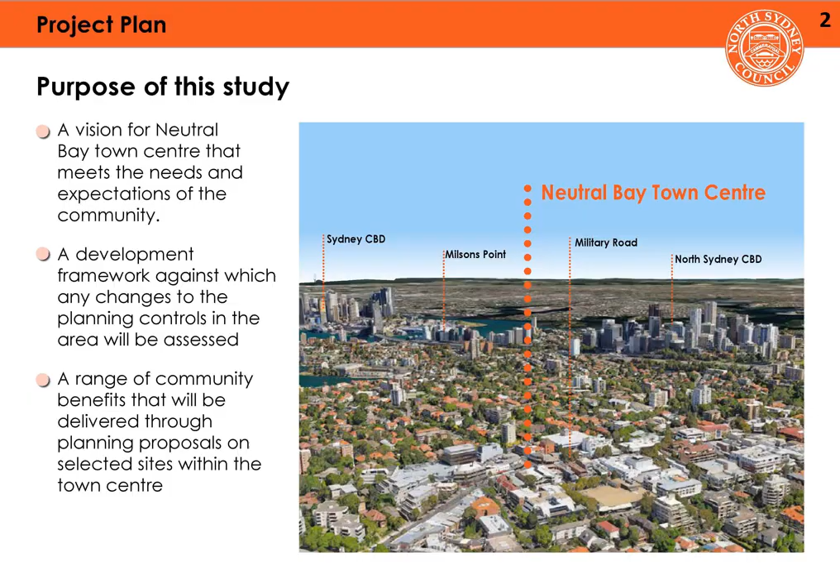Neutral Bay Town Centre is built on the traditional land of the Cammeraygal people. The name Neutral Bay comes from the non-British neutral ships that could anchor in this bay since 1789. Neutral Bay Town Centre started to flourish when a tram track was built along the ridge to supply fortifications at Middle Head. The tram track is what we now know as the Military Road.

The Neutral Bay Town Centre area is east of the Warringah Expressway and clearly away from the regional Eastern Economic Corridor that includes major infrastructure and high-rise development now being finalised, with further major growth being absorbed in this regional corridor over the coming years. East of the Warringah Expressway is distinctly different, with older, taller residential buildings rising up to 16 stories.

The B-Line Transport project has made an impact on public transport and regional traffic on Military Road in recent years. However, there's a great opportunity for the village feel of Neutral Bay Town Centre when the planned Beaches Link tunnel could potentially bypass the centre in the future. Council is negotiating the best outcome if this state government project gets the go-ahead.

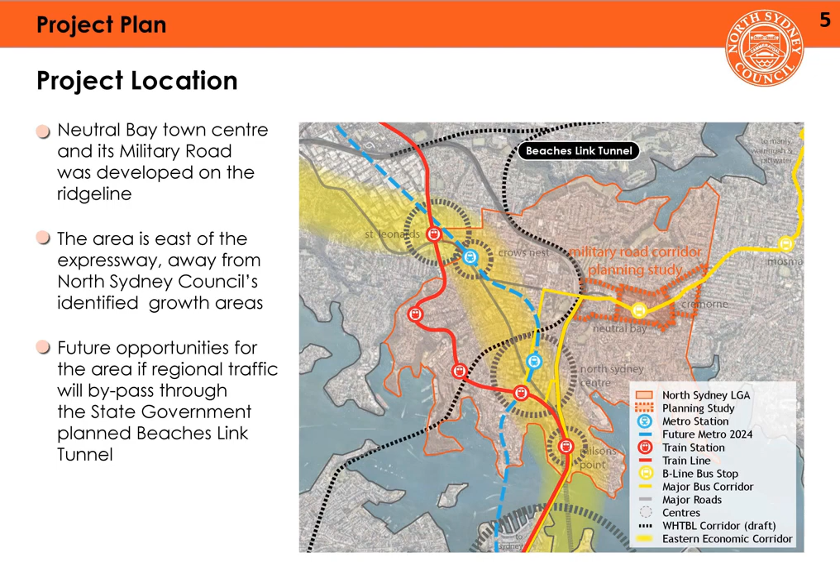The Neutral Bay Town Centre is dominated by commuter traffic on Military Road, which has created a major barrier between the northern and southern sides of the centre. The historical function of the road is clear in its physical structure. The scale and function has shifted in favour of the private motor vehicle, to the detriment of local and pedestrian amenity.

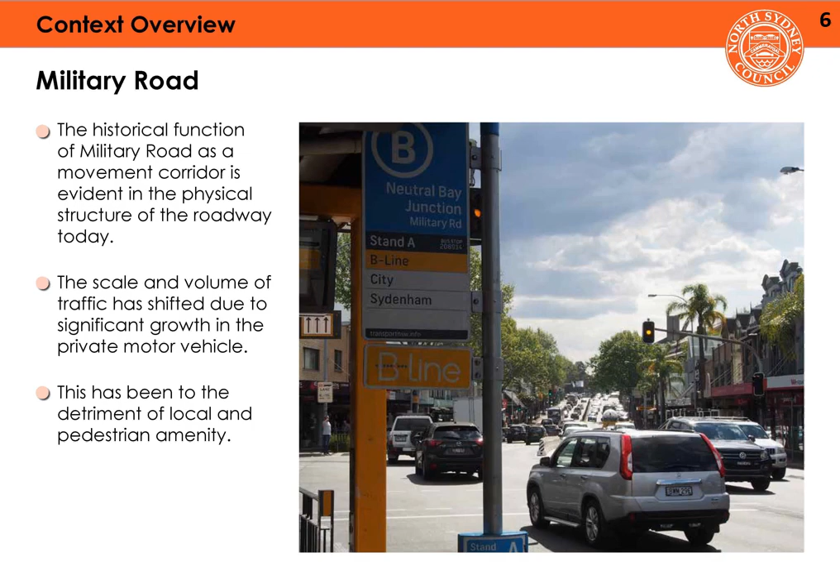And while pedestrian amenity has gone down, the residential density has gone up. Traditionally, buildings were predominantly fine-grained commercial, with single dwellings in the surrounding area. During the 70s, new buildings, including more office blocks and residential high-rises, were built, some up to 16 stories high.

The current planning controls enable modest increases in density. More density also means an increased demand on the public domain and community facilities.

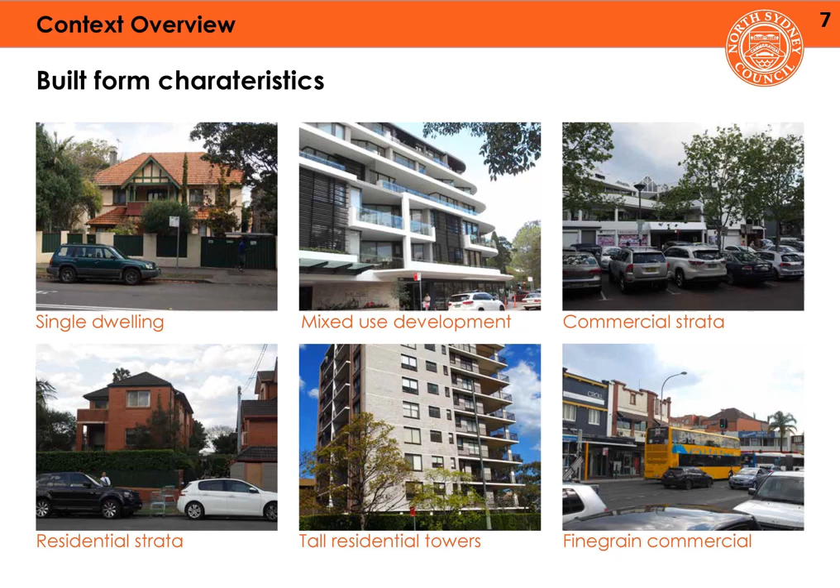The described characteristics result in a different demographic in the area compared to Greater Sydney. Residents are generally well educated and without children. There's a mix of users with a great amount of jobs balanced by residential dwellings. However, the redevelopment of office blocks and focus on residential development has slowly resulted in less office space. I will explain this more later in this presentation.

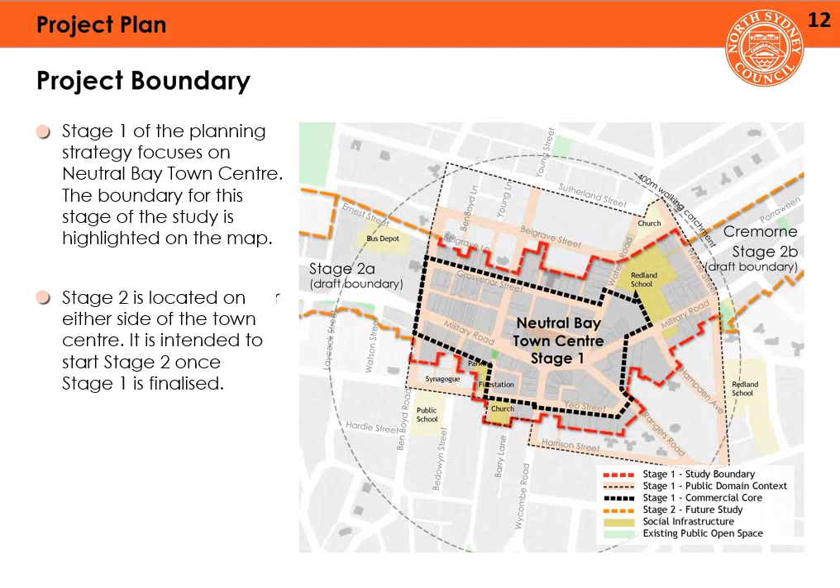Neutral Bay Town Centre is in a period of transformation, with current planning controls becoming increasingly outdated as demand for commercial, residential and community facilities intensifies. The existing planning controls are outdated and don't support the right balance of uses. And new development tends to result in residential strata-titled buildings, which constrain future changes to buildings. This is tending to reduce the amount of employment space currently in the centre.

New development can be balanced with public domain and community facilities that are informed by the needs and aspirations of local residents, businesses, and other users.

This is a rare and important moment for the area. Council can counter the identified decline in office floor space and jobs in the local area. Council can also balance the building height increase with tangible public benefits. And generally, sites are now changing to mixed-use strata ownership, while developers can challenge the existing planning controls. Therefore, doing nothing is not an option.

Under current legislation, developers are able to bypass council with their development aspirations directly to New South Wales government. Having a firm vision framework places council in a stronger position to negotiate the best community outcome when development proposals come in.

This report proposes contextual refinements to building controls and public domain. It seeks to meet the demand of future employment floor space, and it proposes in-kind public contributions on 4 selected sites in return for extra building height.

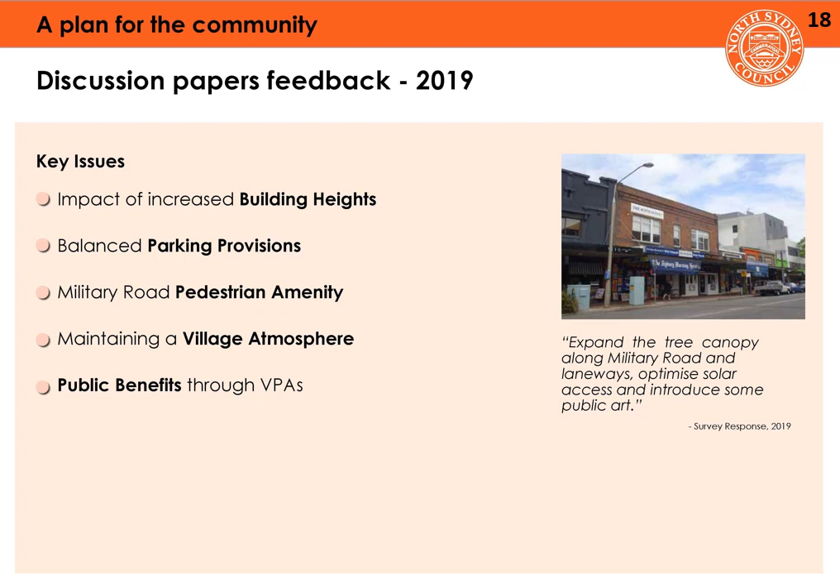Opportunities to deliver public benefits that are in high demand, such as public domain and community facilities, by private development were identified in more detail.

Chapter 2. Placemaking Strategy.

Previous council studies identified strategies for several council-owned assets. The North Sydney Council Community Land Study of 2016 identified ideas for better utility of the Barry Street car park. The 2015 Grosvenor Lane Planning Study presented ideas on the Neutral Bay Community Centre and the Grosvenor Lane car park. The strategies explored design and community benefit outcomes, including the provision of a public plaza, which is highly desirable.

These strategies and interventions were reviewed, are now updated, and combined in this report.

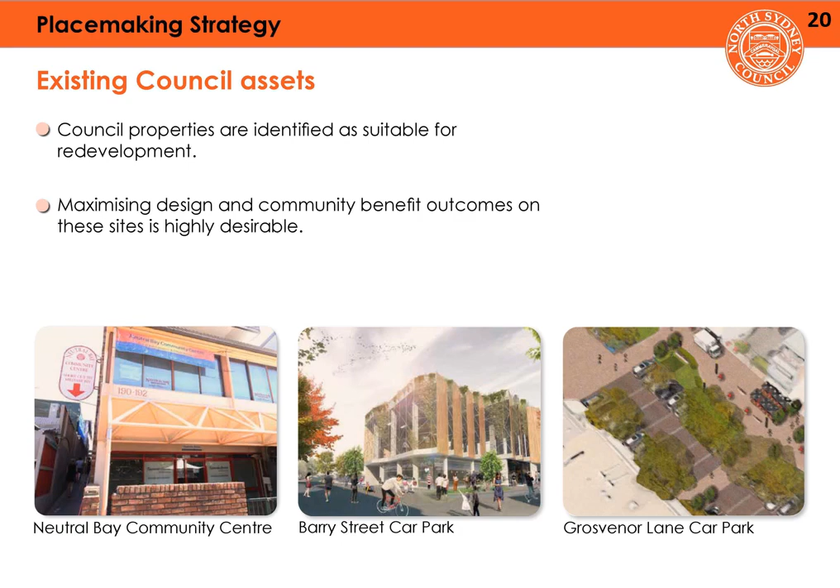Following analysis and community feedback, this report has identified the following demand for community facilities in the Neutral Bay Town Centre: an improved community centre, an indoor recreational facility that caters to a variety of sports and activities, artist studios and exhibition spaces, commuter bicycle parking, and a new affordable childcare space.

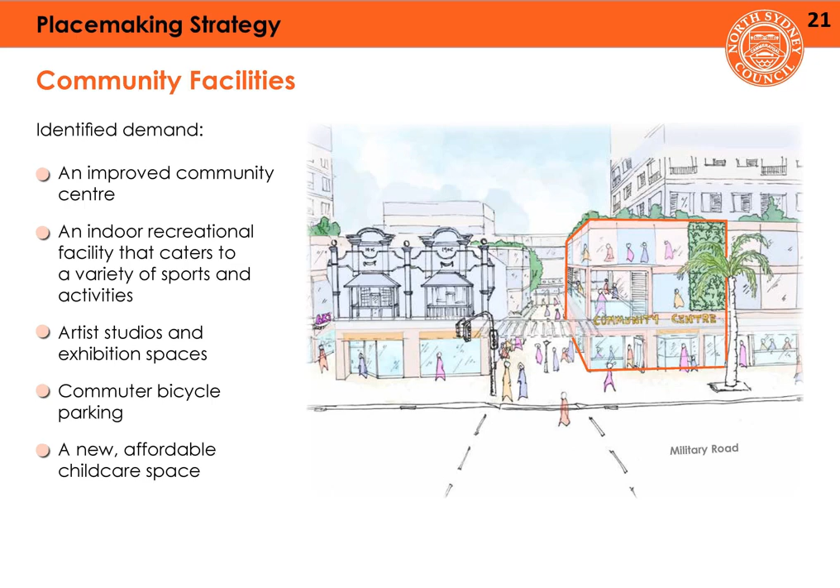The strategy further identifies opportunities for public domain improvements, including a pedestrian plaza with underground public parking and supermarket at Grosvenor Lane, shared zones on Waters Lane and Grosvenor Lane, pedestrian plaza and underground supermarket at Rangers Road, through-site links and ground floor setbacks, pedestrianised Barry Street and underground public car park, and a potential adaptive reuse of the Neutral Bay Fire Station could also provide further outdoor space at the back while respecting the heritage status of this building.

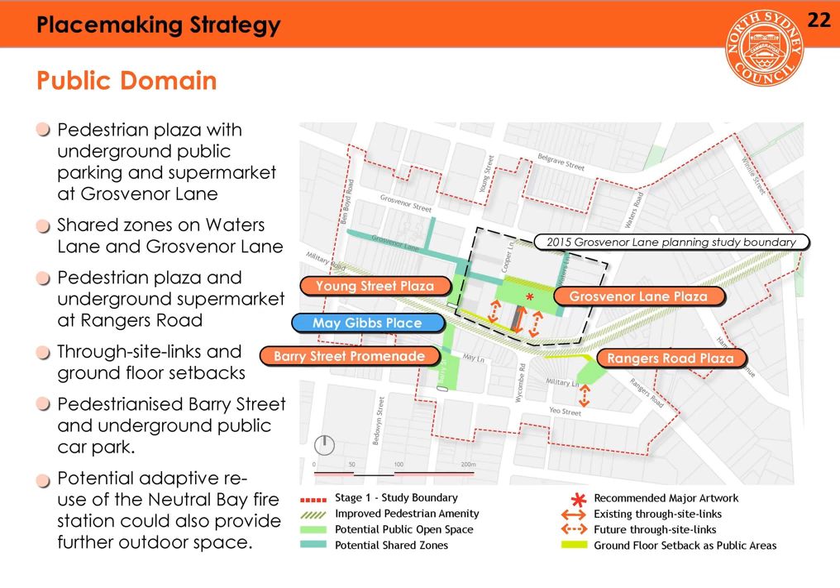As the need to deliver more community facilities and public domain improvement increases, it is crucial to look at how these facilities are funded. One key approach is the earlier described in-kind contributions, where Council negotiates with developers to deliver community benefits when assessing planning proposals.

Chapter 3: Future Growth.

Designing for pedestrians and increasing the amount of public space to walk, rest and socialize makes streets and public spaces accessible and safe for all ages. It also makes the town centre more attractive for businesses and residents.

The streetscape should be visually interesting and include engaging building frontages with continuous awnings to provide shelter. Materials for shared zones will continue across intersections to slow down traffic and enhance perception of pedestrian safety. This chapter aims to support cycling and walking as key modes of transport, enhance the connectivity and amenity across and along Military Road, and continue the support for loading needs of local businesses.

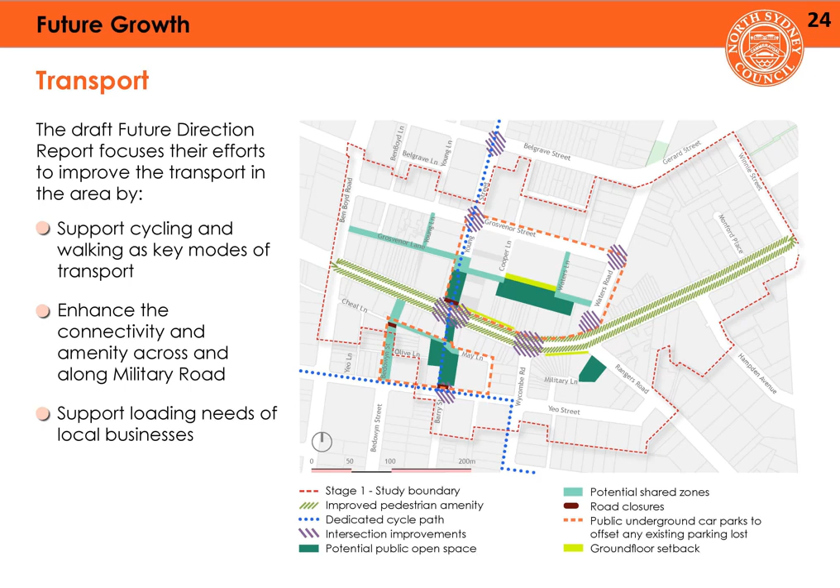When looking at transport, parking is an important consideration. The draft Future Direction report proposes to maintain the existing parking spaces and move 155 spaces underground. Introducing further public parking would increase the amount of traffic onto the road network, which would lead to more congestion, increased risk of crashes, decline in pedestrian activity, less on-street social interaction, and poorer community health outcomes. Poorer on-street shopping amenity would also result in a decline of business activity.

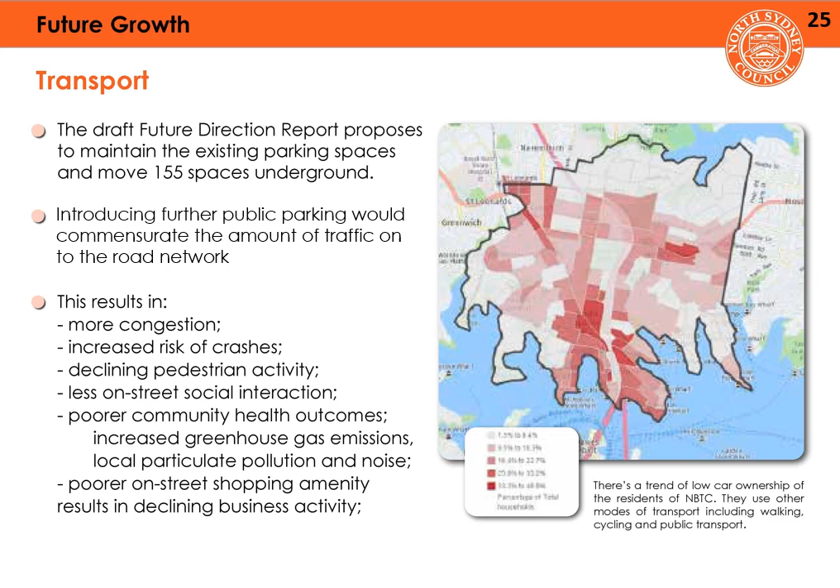Analysis on employment has shown that recent development has included far less office space. If this trend continues, more than 1,350 jobs and almost all office space will be lost. Currently, we have 2,850 jobs in the area, but that could go down to 1,500. This is in stark contrast to the need to actually grow to 4,000 jobs in 2036 to keep up with local demand and local jobs.

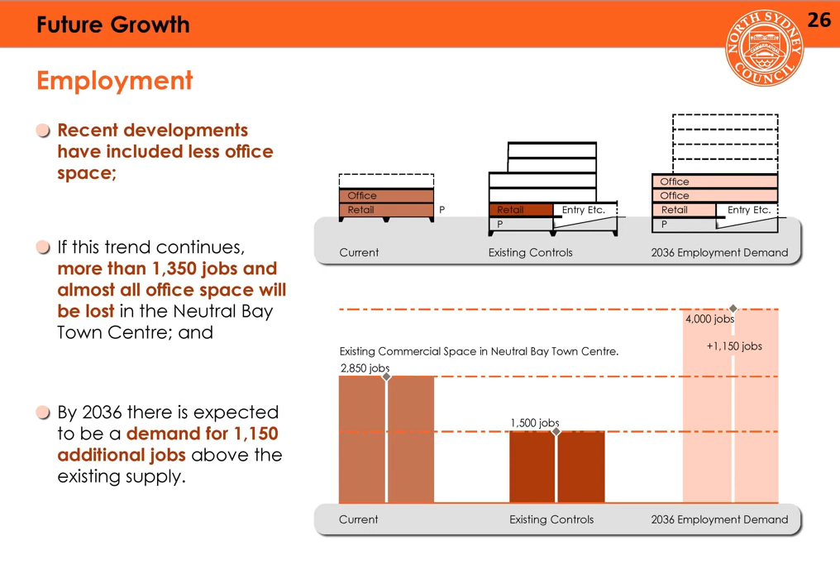The report aims to maintain the existing level of shops and services in the centre and ensure that new development supports long-term employment to keep local jobs in the area. To do that, we need to change the planning controls by increasing the non-residential floor space ratio and building height to deliver this.

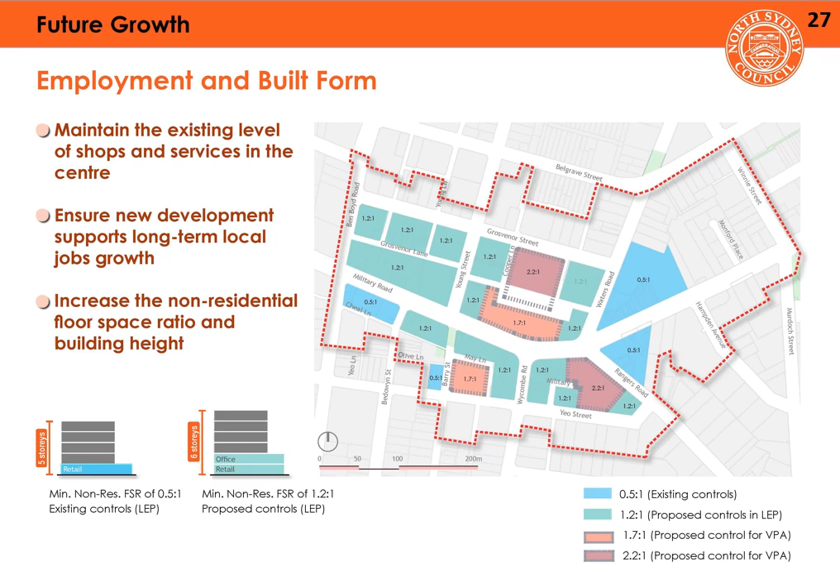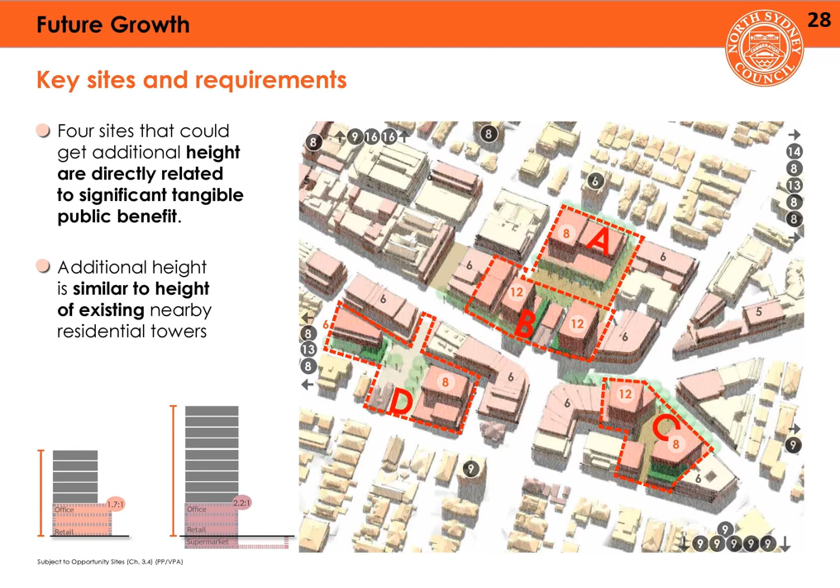Feedback during initial community engagement highlighted a need to deliver additional public open space and community facilities. Four key locations for development have been identified to deliver these public benefits, having regard to the capacity of those sites to support additional development. Planning control changes on these sites would include increases to maximum building heights and employment floor space. Public benefits will be negotiated via a planning agreement to support each planning proposal. Key urban design principles for each site are described in the following slides and should be referred to when a planning proposal is prepared.

Site A is located at 4351 Grosvenor Street and contains the council-owned Grosvenor Lane car park and a large supermarket. The site is enclosed by Cooper Lane, Waters Lane and Grosvenor Street. Further non-residential floor space is required. There is potential to improve public amenity by creating a fully pedestrianised plaza, an underground public car park, as well as a supermarket. A ground floor setback on new development widens the plaza. By focusing the distribution of higher buildings to the Grosvenor Street edge, maximum solar access to the plaza is achieved.

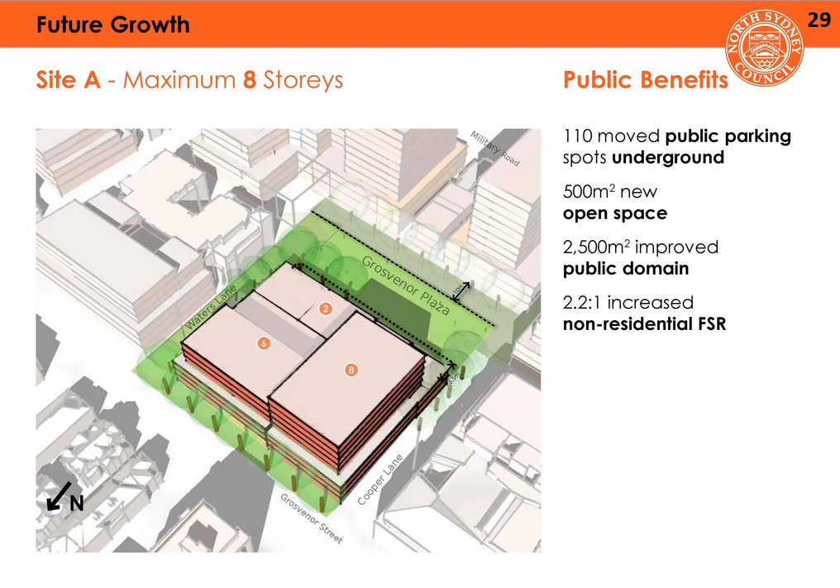Site B is located at 176-214 Military Road and includes part of Grosvenor Lane car park. The site is bounded by Military Road and Grosvenor Lane. Properties to the north directly along Waters Lane and south directly along Young Street are not included in the scheme. It enables development of 2 mixed-use buildings of up to 12 stories in height, supported by new and improved public domain, a community centre, accessible facilities, creative space and through-site links. Existing heritage buildings will be integrated thoughtfully into any new development.

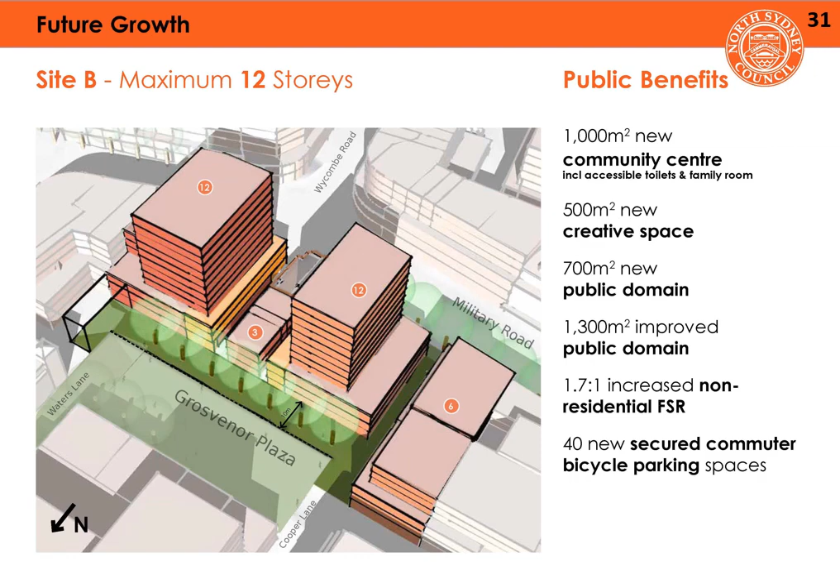Neutral Bay Town Centre has 3 unique pedestrian connections from Military Road into the Grosvenor Lane car park. Retaining these links when redevelopment occurs is part of this plan.

Site C is located at 183-185 Military Road and 1-7 Rangers Road. The site is enclosed by Military Road, Rangers Road and Yeo Street. It includes a new public plaza, a recreational facility and a through-site link to Yeo Street. These benefits to the public domain are achievable through an underground supermarket and an increase in maximum building height to 12 stories.

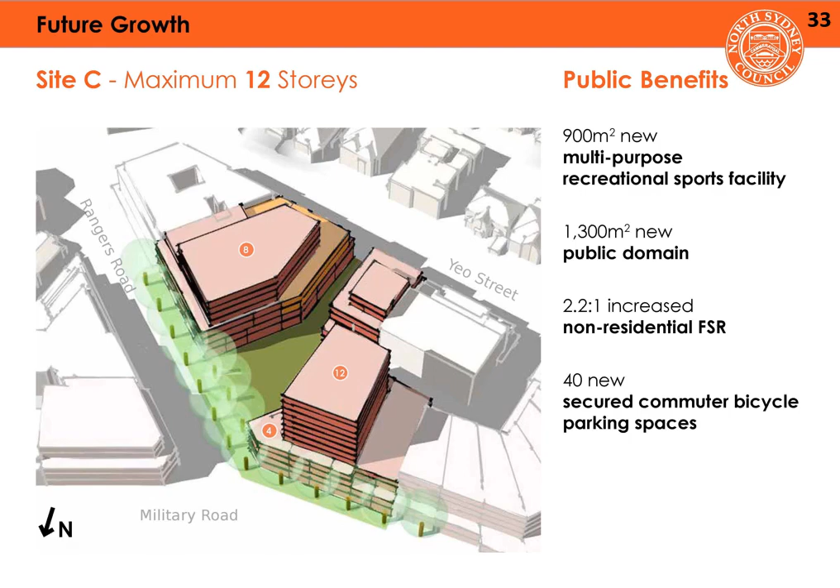The future Rangers Road Plaza south of Military Road will be activated by retail, cafes and restaurants along the edges and a continuous open plaza which can host a variety of community events.

Site D is located at 2737 Bydown Street and includes Barry Street Car Park and 40 Yeo Street. The site is enclosed by May Gibbs Place, May Lane, Cheal Lane to the north, Olive Lane and Yeo Street to the south, and Bydown Street to the west. Barry Street runs through the middle.

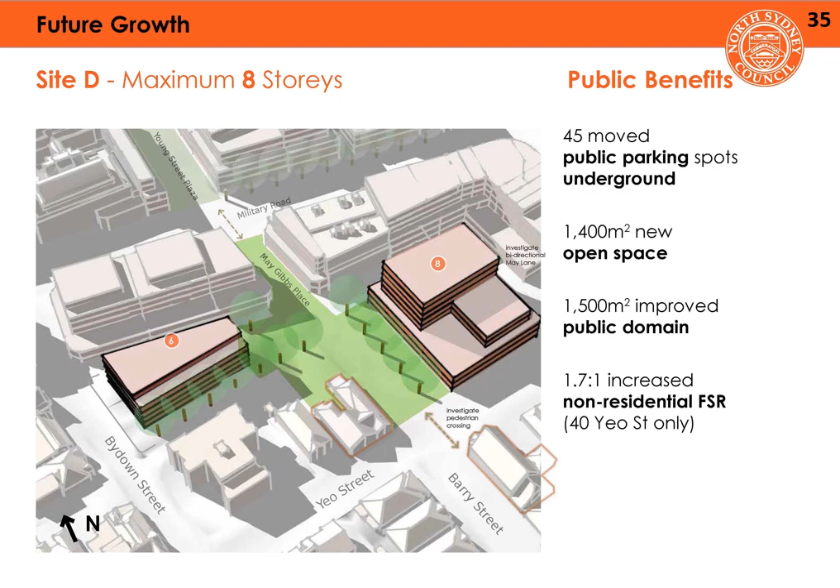There is opportunity to expand the public domain of May Gibbs Place into Barry Street towards Yeo Street to create a pedestrian plaza. Future development along Barry Street should expand onto this public domain spine. In addition, the redevelopment of Barry Street Car Park should relocate existing public parking in the area underground.

A pedestrianised promenade along Barry Street will improve accessibility in a north-south direction through the town centre and link existing public domain sites, including May Gibbs Place and the potential Young Street Plaza across Military Road.

In summary, the draft Future Direction Report proposes to increase building height from 5 stories to 6 stories to meet the estimated demand of employment floor space in 2036. 4 larger sites can deliver tangible public benefits in return for building height, with 3 taller buildings of 8 stories, 3 taller buildings of 12 stories, and other buildings kept at 6 stories building height.

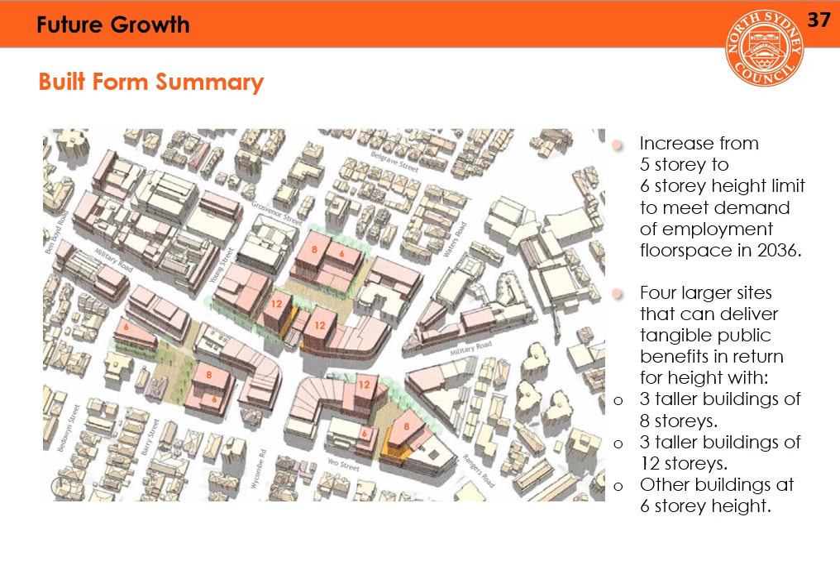With these building heights, the draft Future Direction Report is looking to enable an array of public benefits including 155 underground public car park spaces, a new 1,000 square meter community centre, approximately 3,200 square meters of new public open space and 5,200 square meters of existing public domain upgrades, a creative maker space art alley, a new 900 square meter indoor recreational facility and 80 secured commuter bicycle parking spots.

Once the public exhibition of this report is finalized, Council will work towards a final report. Once a future direction is adopted, planning proposals can be lodged that look to modify the existing planning controls consistent with Council's vision. Planning proposals will deal with detail and go on public exhibition as well.